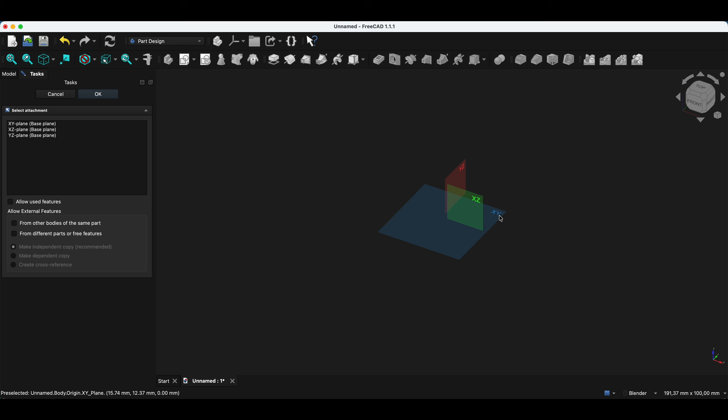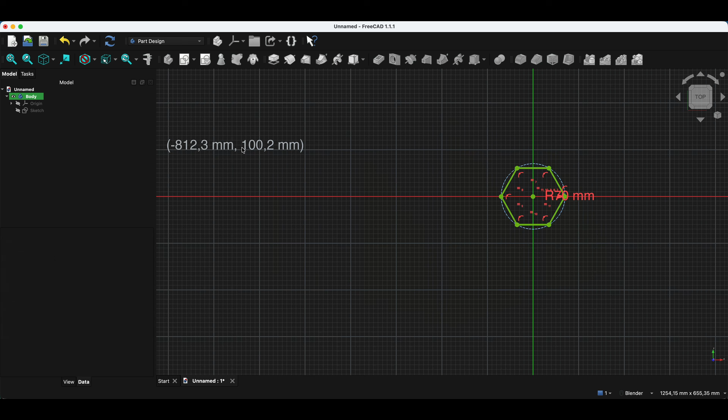Is FreeCAD perfect? It is not. Does FreeCAD have problems? It does. Can it sometimes be frustrating? Definitely yes. But does that mean FreeCAD makes no sense, is not suitable for work, and is not worth learning? In my opinion, absolutely not.

That is exactly what this video will be about, because when we talk about CAD programs, we very often fall into a trap of black and white thinking. Either a program is perfect, professional, polished, and the best, or it is weak and not worth wasting time on. But reality is a little more practical, because a CAD program doesn't have to be perfect to be useful.

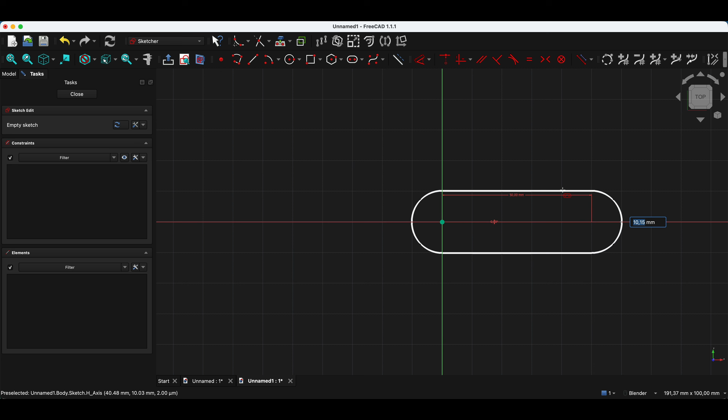For me, FreeCAD is a very good example of this kind of tool. It is not perfect, it is not for everyone, and it will not always be the best choice, but in many situations it can be good enough to solve a specific problem, and sometimes that is exactly what matters most.

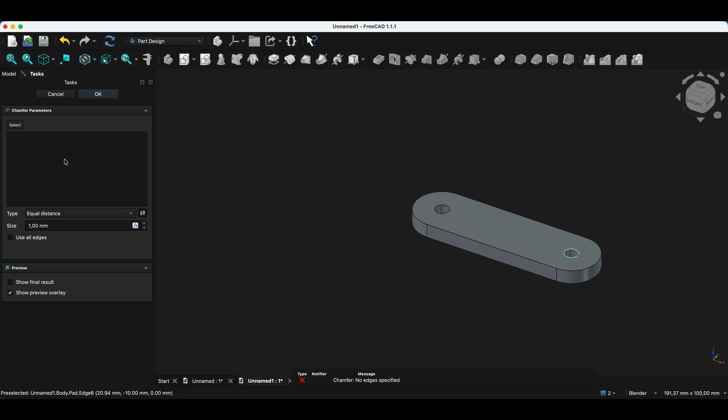Let us start with something simple. When someone asks whether FreeCAD is good, the first question should be: good for what? Because we will evaluate FreeCAD very differently if we compare it with an expensive CAD system in a large manufacturing company where several people work on shared assemblies, documentation, part libraries, PDM, and very specific procedures, than if we evaluate it from the perspective of someone who wants to design a simple bracket, enclosure, spacer, adapter part for 3D printing, or a single part for a workshop.

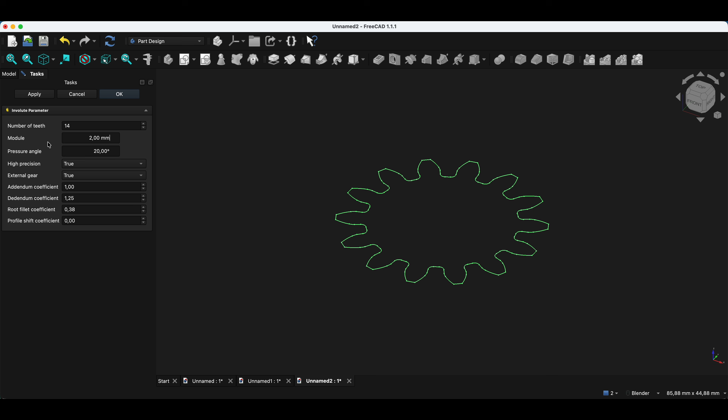These are two different worlds, and the problem begins when we apply one standard to FreeCAD for every possible use. If someone expects a free, open source program to be as convenient, polished, and predictable in every respect as very expensive commercial CAD systems, they will probably be disappointed very quickly.

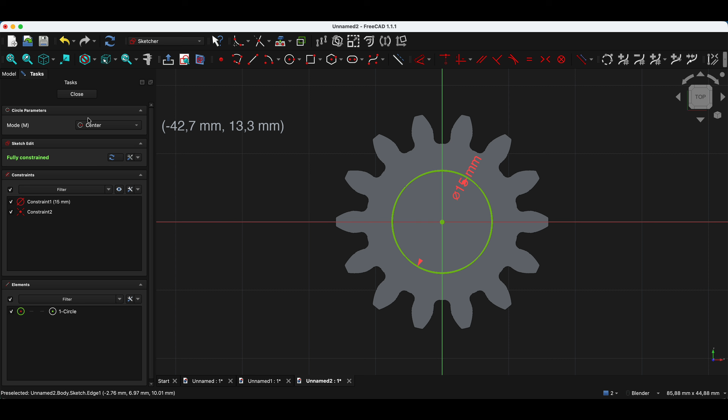But if someone is looking for a tool that will allow them to learn the basics of 3D modeling, prepare their own designs, create technical parts, and work without licensing costs, then FreeCAD starts to look completely different, not as a perfect CAD system, but as a very useful tool.

And this brings us to the most important point. Usefulness doesn't mean perfection. Usefulness means that a tool helps us complete a specific job.

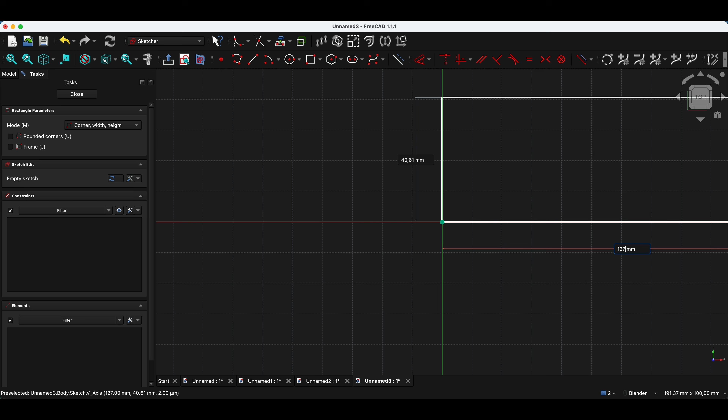A hammer is not the perfect tool for everything either, but if you need to drive in a nail, it is very useful. A basic phone camera will not replace a professional camera in every situation, but for most people it is good enough to take a picture of a document, a product, a note, or something they want to show someone quickly. And FreeCAD is similar.

It doesn't have to be the best at everything. It is enough if in a specific situation it allows us to do what we need, and very often it does.

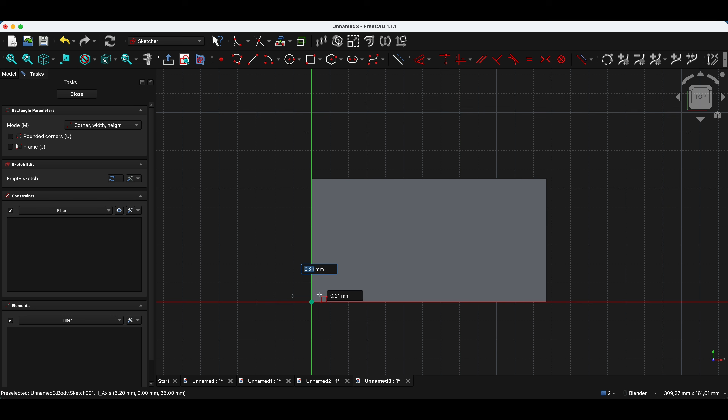We can create sketches in it, we can build parametric solids, we can change dimensions, we can export models for 3D printing, we can prepare simple technical parts, we can create technical drawings, we can work with STEP files, we can learn the basics of design thinking, and for many people that is already extremely valuable, especially if they previously had no access to any proper 3D CAD system.

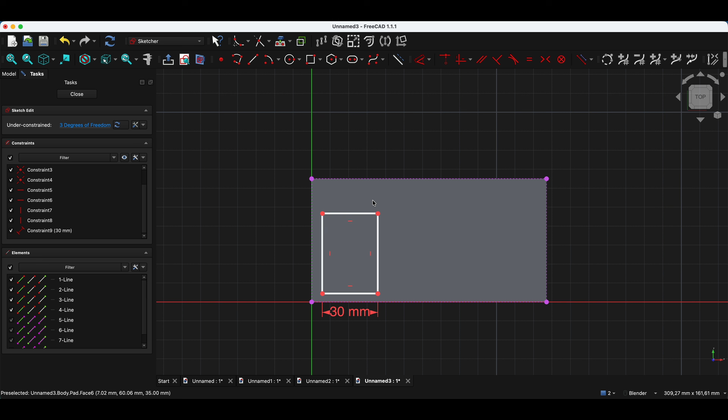One of FreeCAD's greatest advantages is, of course, that it is free, but I wouldn't reduce its value only to the fact that you don't have to pay for it, because a free tool can be completely useless if it doesn't allow us to do anything meaningful. However, FreeCAD is interesting because it is free and at the same time allows us to create real 3D models.

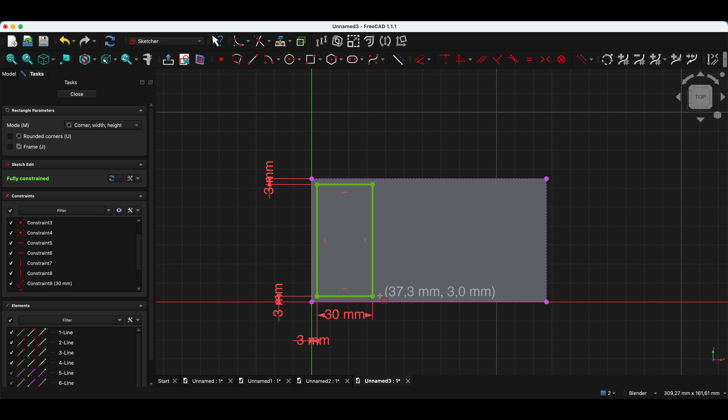And that changes the situation for many people. For a hobbyist who owns a 3D printer, for someone who wants to design something for their home, for a small workshop, for a teacher, for a student, for someone checking whether 3D modeling interests them at all, and for someone who doesn't want to or cannot pay a monthly subscription for CAD programs.

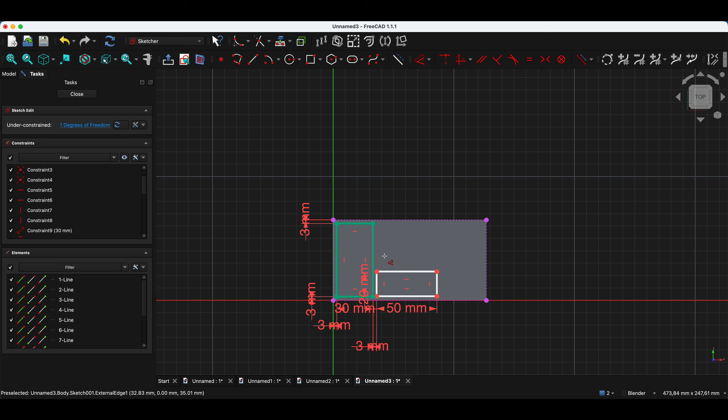In situations like this, FreeCAD can be a very good starting point, even if it is not perfect, because the barrier to entry is low. You can download it, install it, and start learning.

You don't have to decide whether buying a license is worthwhile, and you don't have to wonder whether the program will become too expensive after the trial period. You don't have to worry that your project will be locked a few months later because access to your account has expired. Of course, learning still takes time, but at least entering this world is easier.

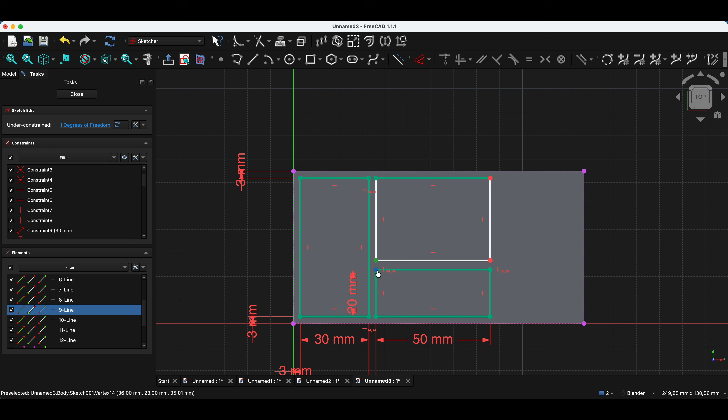And now, an important point. I don't want to say that FreeCAD has no flaws, because it does. The interface can be a little chaotic for beginners, and some things are less intuitive than in other programs. Sometimes you need to know which workbench contains a specific command.

Sometimes an operation that seems very simple in another program requires several additional steps in FreeCAD. There can also be problems with the parametric model. Sometimes, after changing an earlier sketch, something breaks, something loses its reference, or the model needs to be repaired.

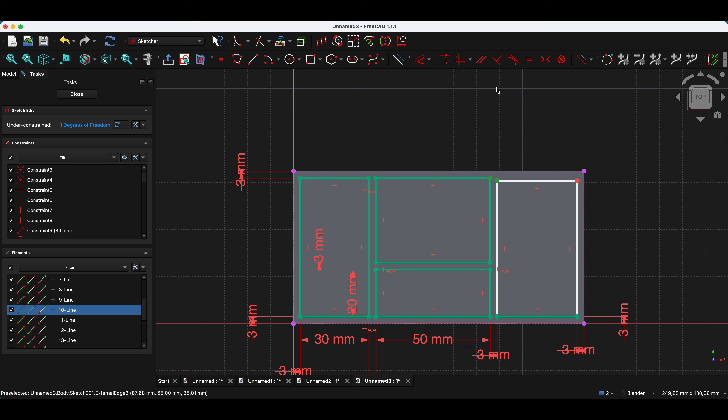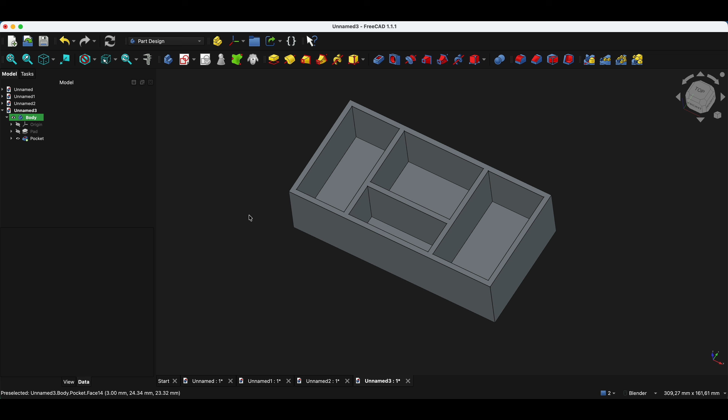There are situations in which you need to learn good working habits in FreeCAD, for example, not attaching everything to random edges, not building the model too chaotically, and not assuming that every change will always work without a problem. But that is also an important lesson, because parametric modeling requires thought in every program. FreeCAD can be less forgiving than some commercial systems, but that doesn't mean it teaches you nothing.

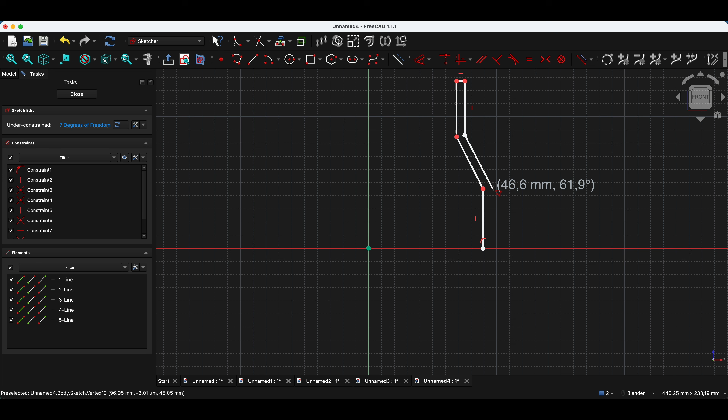Quite the opposite. Sometimes it teaches you a great deal because it forces you to understand what you are actually doing. We are not simply clicking one icon after another. We need to understand the sketch, constraints, relationships, the order of operations, planes, references, and the structure of the model, and these are fundamentals that will be useful in every CAD system.

It is also worth looking at FreeCAD from a beginner's perspective. Beginners often look for a program that will be easy, fast, clear, and immediately enjoyable, and that is understandable, but there is another side to it.

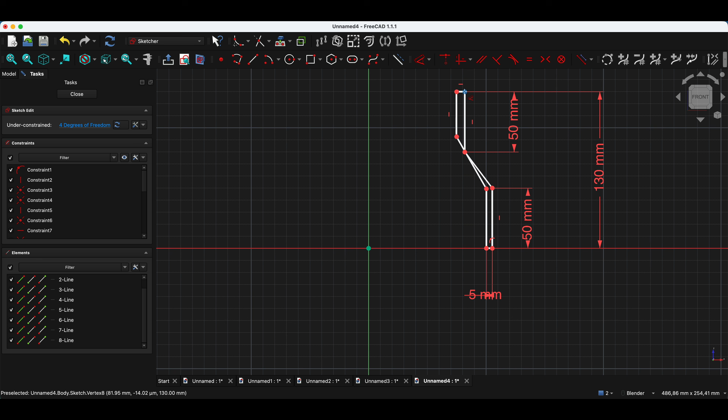At the beginning, the most important thing is not for the program to have the absolute best interface on the market. The most important thing is learning a way of thinking: how to turn a real object into a simple solid, how to start with a sketch, how to add dimensions, how to use an extrusion, how to make a hole, how to add a fillet, how to understand the relationship between a sketch and an operation, and how to modify a model without creating everything again from scratch.

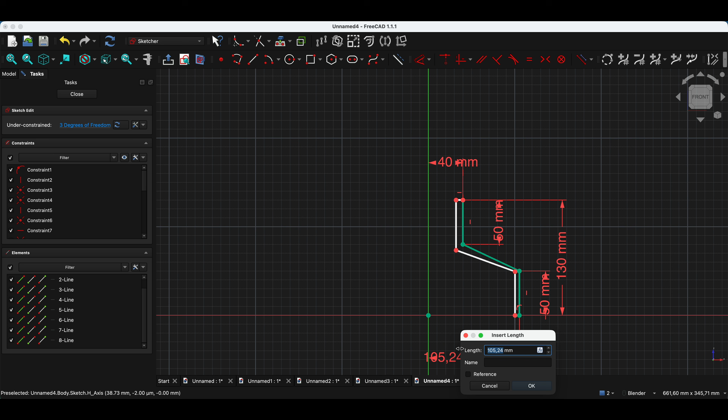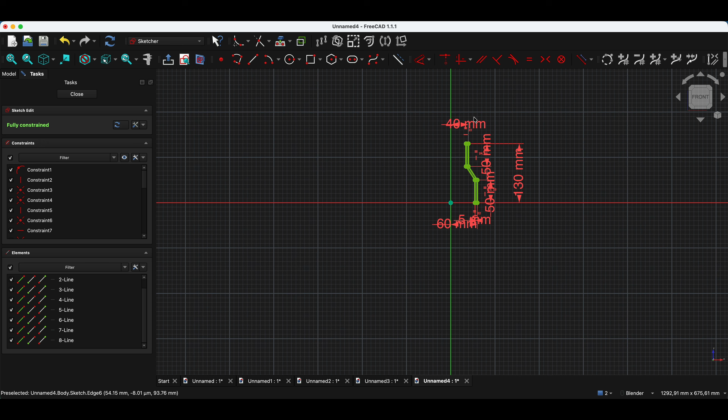And if you learn these things in FreeCAD, that knowledge doesn't remain only in FreeCAD, because it is general knowledge about 3D modeling. Of course, every program has its own interface and its own tools, but the basic logic is very similar. That is why FreeCAD can be a good place to learn, even if someone later switches to another program, because FreeCAD teaches the fundamentals, and the fundamentals are more important than a specific icon in a specific place.

Another point is practical use. Sometimes the discussion about FreeCAD becomes very theoretical. Is it suitable for professional work? Can it be used in a company? Can it replace expensive CAD systems? Is it stable enough? These are important questions, but they are often too general, because in practice many people don't need a CAD system for designing complex machines.

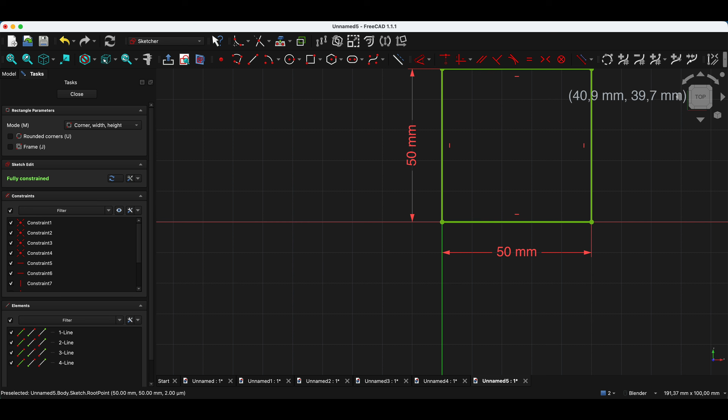They need a tool for simple and moderately advanced tasks. For example, someone runs a small workshop and occasionally needs to design a spacer, a bracket, a simple plate with holes, or some kind of auxiliary part.

Someone has a 3D printer and wants to make their own adapter, organizer, or replacement part. Someone is creating a prototype and needs to check a shape quickly. Someone is learning design and simply wants to understand how parametric modeling works.

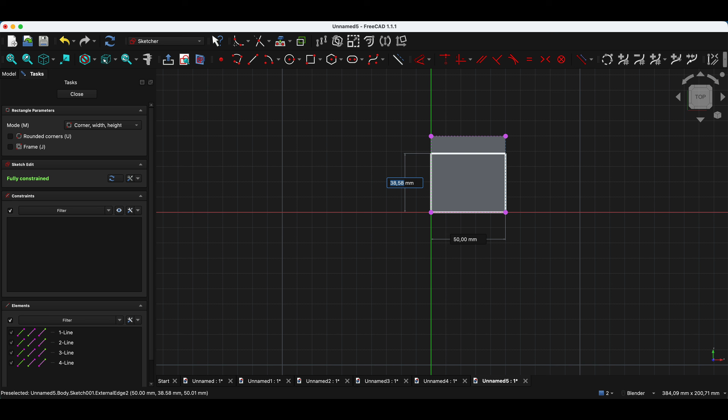And in cases like this, the question is not, is FreeCAD the best CAD system in the world? The question is, does FreeCAD allow me to complete this task? And very often the answer is yes.

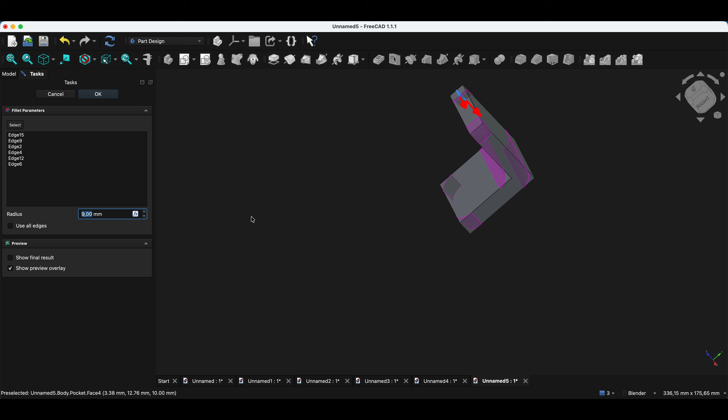Perhaps not always in the most convenient way, perhaps not always in the fastest way, and perhaps sometimes you need to find a workaround, but in the end you can create the model, export the file, and continue using it, and that means the tool works.

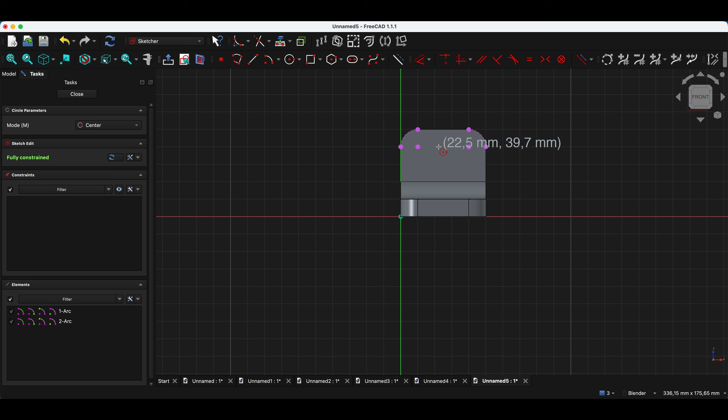I also like to look at FreeCAD as a tool that provides independence, because in the world of software, more and more things are subscription based. You pay every month, you have an account, and you have access. But when you stop paying, the situation changes.

And of course, I'm not saying that subscriptions are always bad. In many companies, they are a normal cost of doing business. If a program pays for itself every day, then paying for a license can be completely reasonable. But not everyone is in that situation.

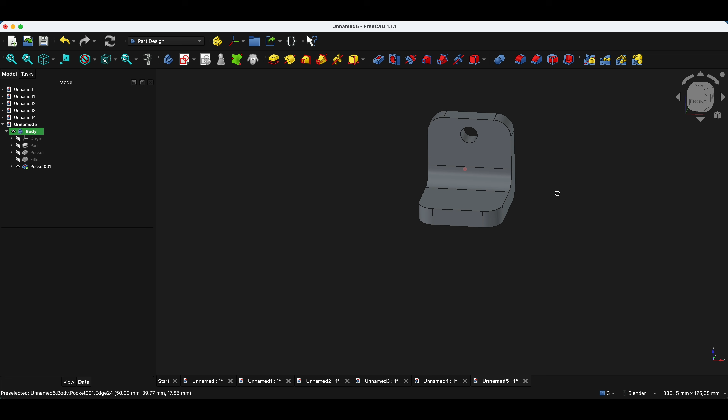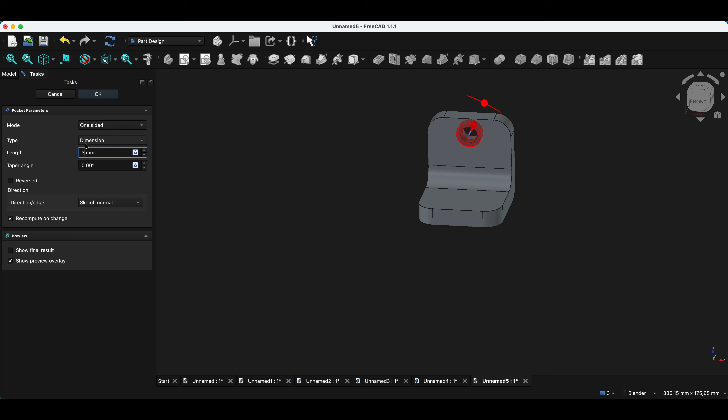For many people, the cost of a program is a real barrier, especially if they use CAD irregularly, for example, once a week, once a month, or only for their own projects, and then FreeCAD provides something very valuable. It provides the ability to work without constantly thinking about licensing costs, the ability to return to a project after a year, the ability to learn without pressure, and the ability to experiment. And even if the program has limitations, that independence is very important to many people.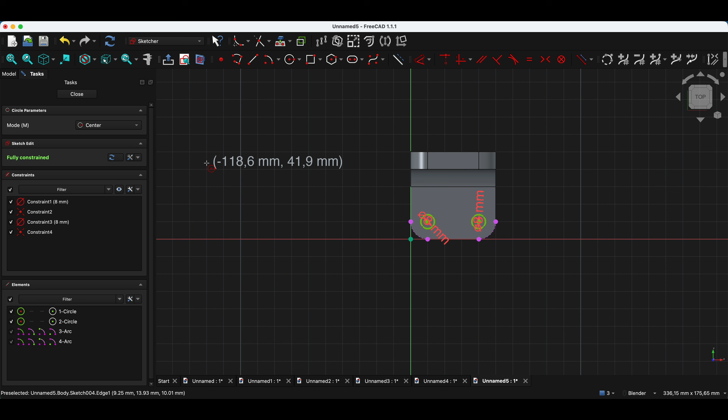Of course, it also needs to be said clearly: FreeCAD will not be the best choice for everyone. If you work in a company where the entire team uses a specific CAD system, where standards, libraries, documentation, and workflows are already established, then you probably will not change everything just because FreeCAD is free.

If you need very complex assemblies, advanced industry-specific tools, then FreeCAD may not meet those requirements.

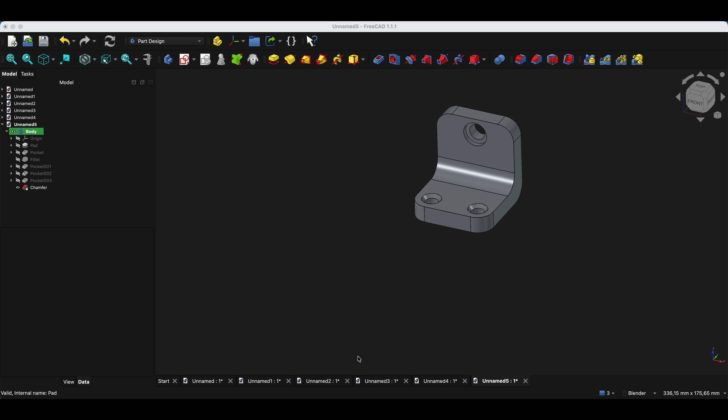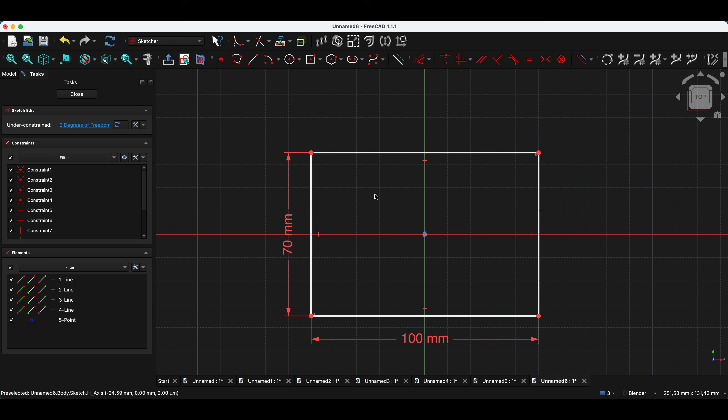Similarly, if you earn your living by designing every day and every hour of work matters, then sometimes a more expensive program can simply be cheaper in practice because it allows you to work faster, and that is normal. The point is not to pretend that FreeCAD is always the best solution. The point is to evaluate it fairly, not through the lens of dreams about a perfect program, but through the lens of a specific use case.

For some people, it will be too limited, for others, it will be sufficient, and for still others, it will be exactly what they need.

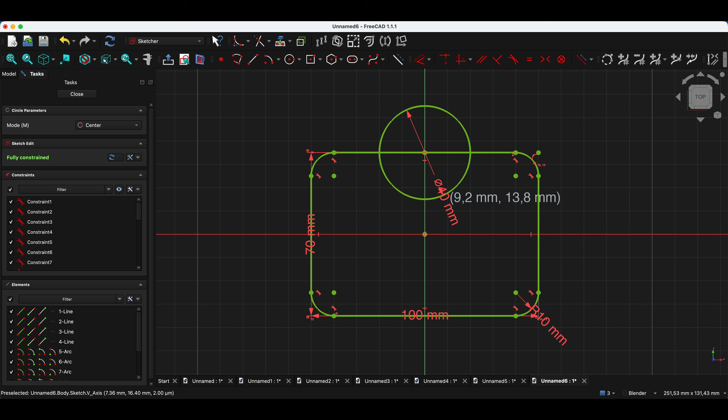And this brings us to something that, in my opinion, is very important when learning CAD. Don't wait for the perfect tool before you begin, because it is easy to fall into the trap of comparing programs. This one has a better interface, this one has better assemblies, this one has better renderings, this one has better shortcuts, this one has better documentation, and this one is more popular in companies. And suddenly, instead of modeling, we spend several weeks analyzing which program to choose.

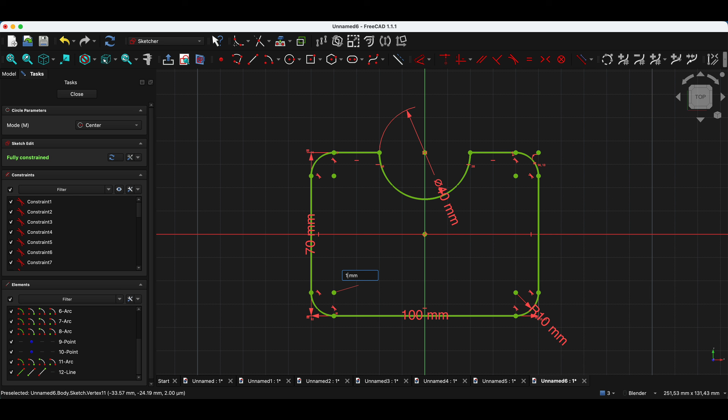Meanwhile, the greatest progress appears when we simply start creating models. Simple models, imperfect models, models with mistakes, but models of our own. Because only then do we truly learn.

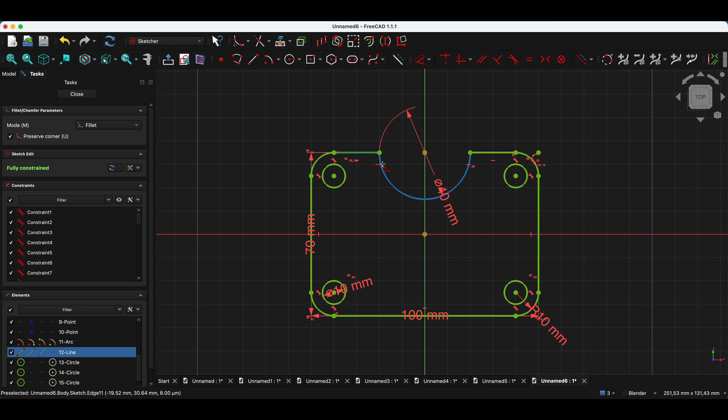And FreeCAD doesn't have to be perfect for you to create your first sketch. It doesn't have to be perfect for you to understand an extrusion. It doesn't have to be perfect for you to design a simple bracket. It doesn't have to be perfect for you to prepare files for 3D printing. It doesn't have to be perfect for you to learn the basics, and at the beginning, this is exactly what matters most.

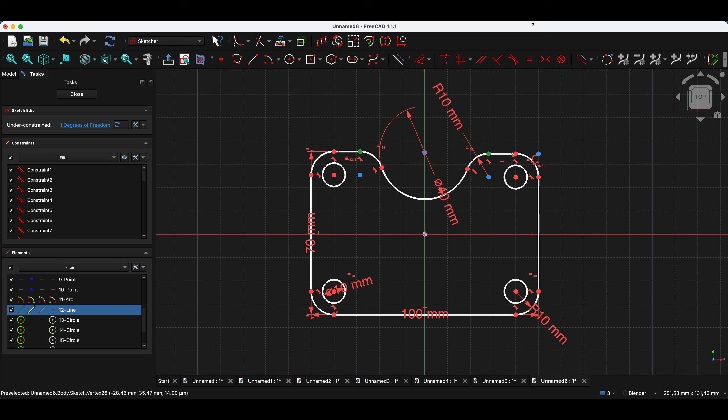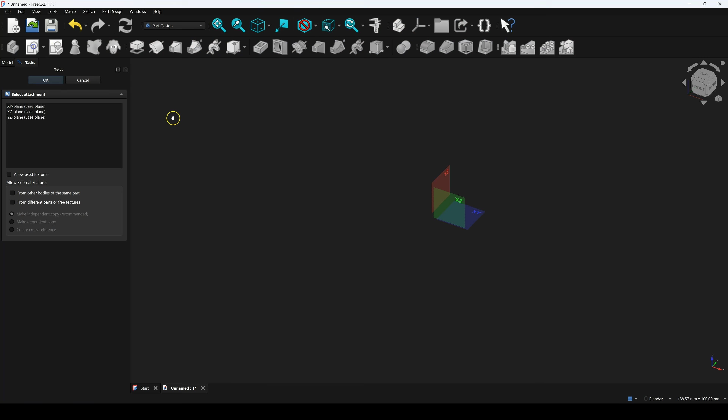You could also say that FreeCAD changes our expectations a little. In commercial programs, we often expect convenience, smoothness, and polish, and rightly so, because that is what we pay for. In FreeCAD, you sometimes need more patience, but in return, we receive something different. We receive a program that is developed as an open project. We receive the ability to work without licensing fees. We receive a tool that can be used for learning, hobbies, small projects, prototypes, and many practical tasks. We receive a system that may not always guide the user by the hand, but it provides real capabilities.

And in my opinion, it is worth looking at FreeCAD in exactly this way. Not as an inferior copy of a commercial program, but as a separate tool with its own strengths and weaknesses. If we accept its limitations, it becomes easier to see its value, because very often the problem is not even FreeCAD itself. The problem is expectations.

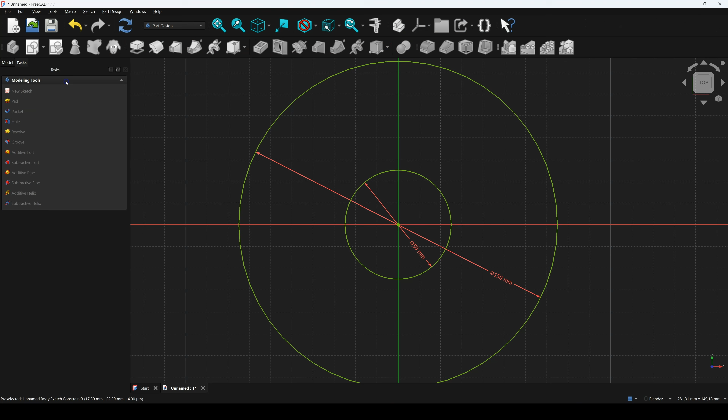If someone opens FreeCAD and expects to be designing like they would in a professional system after 15 minutes, they will probably give up. But the same thing can happen in many other CAD programs. 3D modeling requires learning, it requires practice, it requires several unsuccessful projects, and it requires understanding that a parametric model must be built with a certain logic.

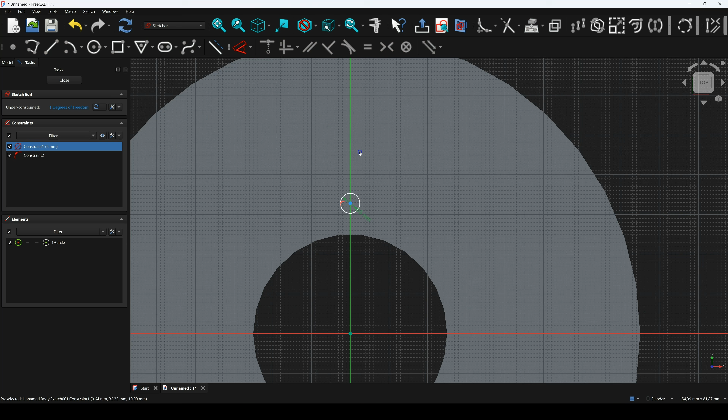FreeCAD doesn't remove that difficulty, but it gives you access to a tool on which you can work through that difficulty. And over time, things that seem chaotic at first begin to make sense. Sketches become more organized, operations begin to form a logical whole, we start predicting what might break, and we start building models in a way that makes them easier to modify later.

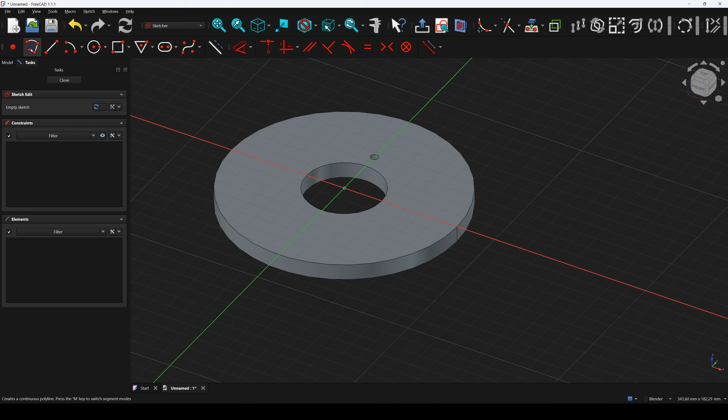And then FreeCAD becomes increasingly useful, not because it suddenly became perfect, but because we better understand how to use it. And I think that is a good conclusion for this video.

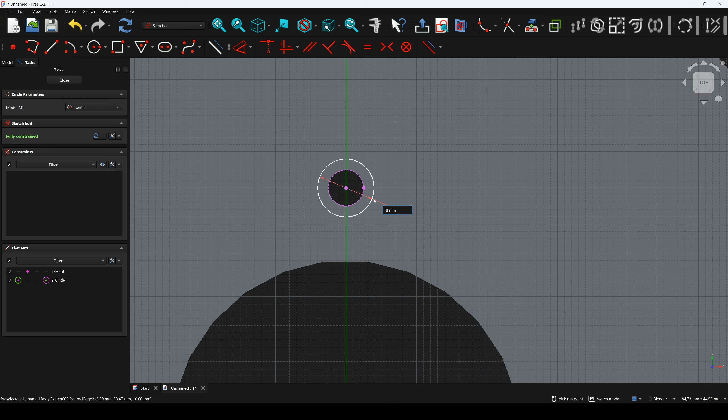FreeCAD doesn't have to be perfect to be useful. It doesn't have to win every comparison. It doesn't have to be the best choice for every company. It doesn't have to have the most attractive interface. It doesn't have to be the most convenient CAD program on the market. But...

It can be a tool that allows you to begin. It can be a tool that allows you to learn the basics. It can be a tool that allows you to design a real part. It can be a tool that is useful at home, in a workshop, with a 3D printer, or for small projects. And in many cases, that really is enough, because in practice, we don't always need a perfect tool.

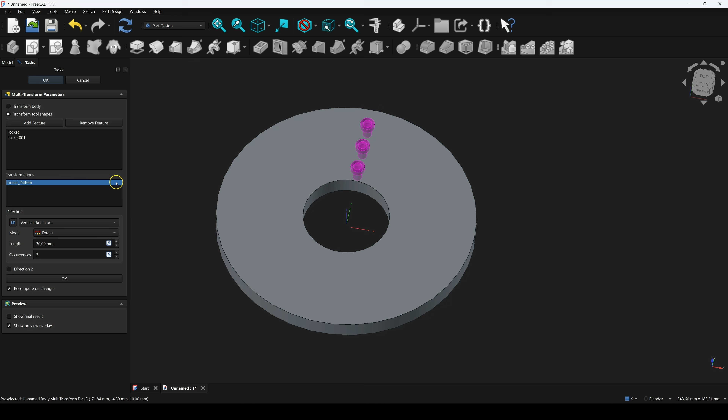Sometimes we need a tool that is available, good enough, and allows us to take the next step. And FreeCAD can be exactly that kind of tool. Not for everyone, not for everything, not without flaws, but still very useful.

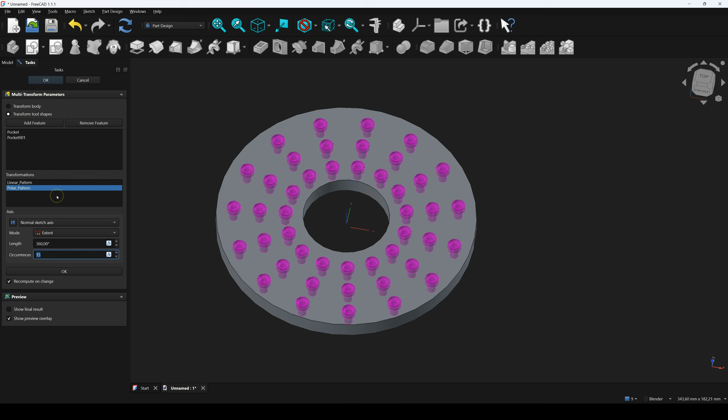If you are only beginning to learn FreeCAD, my advice is simple. Don't judge this program after the first several minutes. Give yourself time, create a few simple models, learn sketches, constraints, extrusions, holes, fillets, and basic parametric work, and only then decide whether this tool suits your needs. Because it may turn out that despite all its imperfections, FreeCAD is good enough for you, and sometimes good enough is exactly what we need.